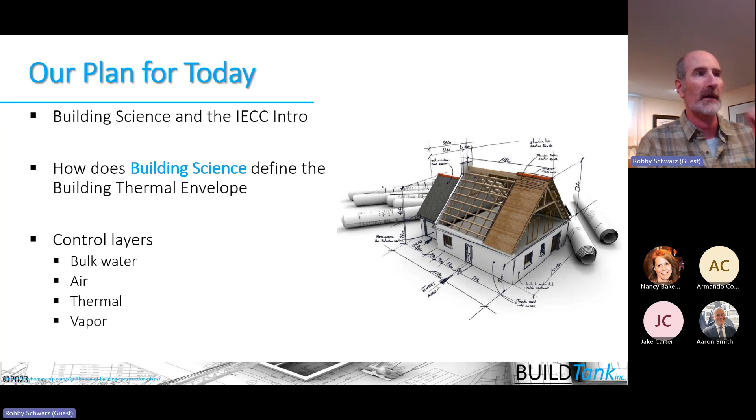So from this perspective of introduction, really our modern day times and the expectations that we have of our houses have changed the way that we build our houses, and hence the need to bring building science more into code. A simple example is that house on the left here that was built in 1910. And if we think about our notion of comfort in 1910, our grandparents might have been in that house. They were really willing to put on a sweater in the wintertime, maybe shovel some coal, put a log on the fire to maintain comfort in the wintertime.

In our modern day houses built in 2020 or 2023, we literally want to be able to walk around in our underwear from room to room and floor to floor and be comfortable. And in Northwest Denver where I live, we're scraping all these old houses, adding these new houses, and we have to figure out how we're going to build houses that are going to meet their expectations, but also be durable, be able to last that 100 years and whatnot.

So, the biggest thing we know is that these older houses are drafty and uncomfortable, yet they're very, very durable. And the primary reason they're very durable is that they have tremendous drying potential. And so as we insulate and we tighten up houses, we're building houses to meet that modern day expectation. We need to make sure that we have proper moisture flow through our building assemblies and proper drying potential. And that's kind of why we're going to be focusing on those control layers and the building science there.

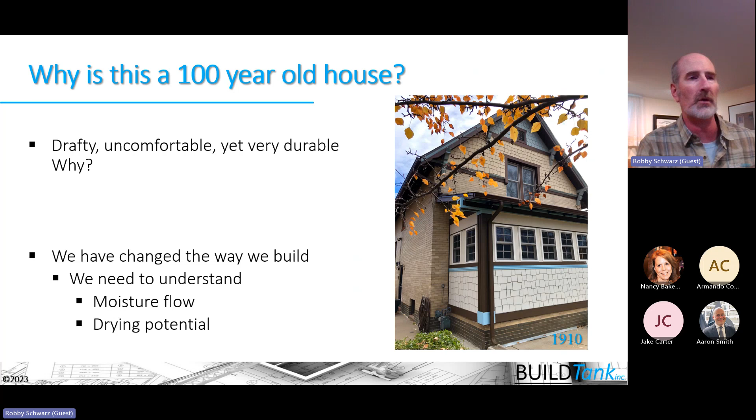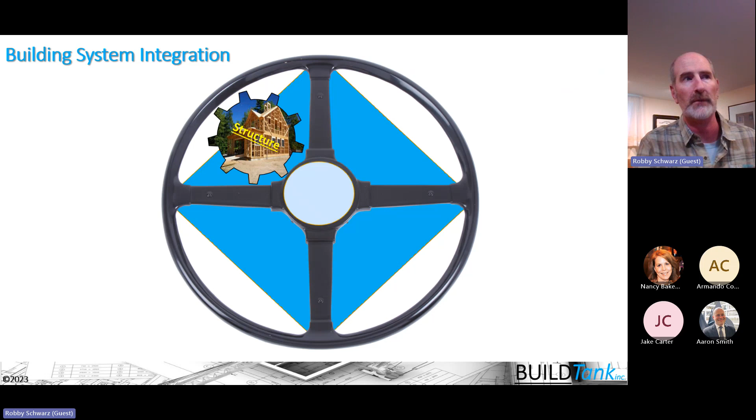From the basics of applied building science, we're really focusing on airflow, heat flow, and moisture flow, and ultimately getting control and predictability of those assemblies that govern moisture flow, heat flow, and airflow in our houses. We're talking about the structures, the systems, the enclosures, and the climate that house is built in.

But the big wild card that the science helps us govern, that the code itself might not look at, is that the code is looking at structure, systems, enclosure, and climate, but the code doesn't integrate people and the crazy things that people do to houses. So incorporating building science into the code gives us the ability to say that if I've built a house for a retired couple of two and the contract falls through and a family of six moves in, that house is still going to perform regardless of the crazy things that people do in it.

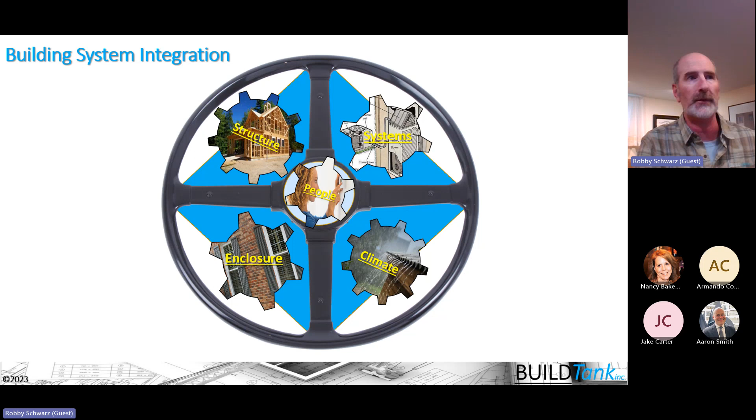When we talk about these control layers and the building science wrapped into the code, each of these control layers is usually listed in order of importance—from bulk water and rain control layers, to air, because of the amount of moisture that moves with air, to vapor control, to thermal control. I'm going to describe them from a code perspective, starting with the thermal envelope, then vapor, air, and bulk water, because you'll see the code—especially the energy code—has this myopic focus on the building envelope and protecting the integrity of the building thermal envelope, then it goes into vapor, air, and bulk water.

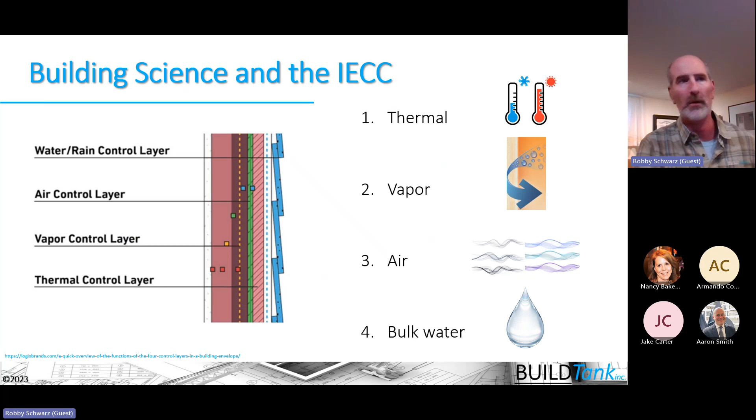The thing we should know about the code is that it's intended to provide flexibility, and that flexibility comes in through different compliance options the code allows. It turns out that builders, especially custom builders, tend to myopically focus on the R-value table, but the R-value table is basically a thou-shalt-do approach to code, and it doesn't give you the flexibility to do what we call trade-offs, which I'll explain a bit.

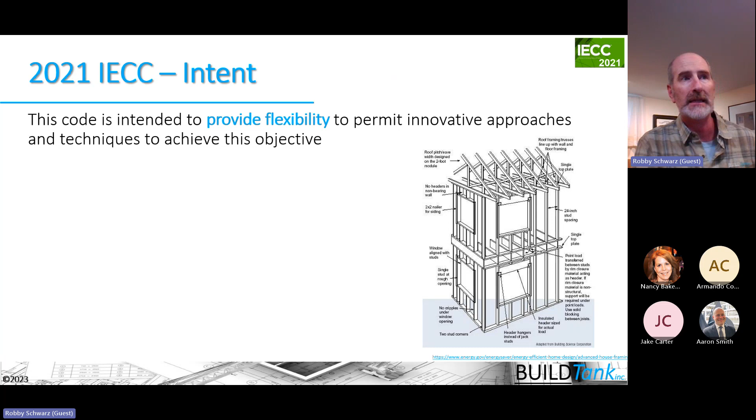When we begin to look at the code, we first have to choose that compliance pathway. That's really a paperwork exercise to tell the code official how we're proposing to build the house to meet the expectations or requirements of the code. That's twofold: one is the energy use that's happening, which is why we begin with maybe some type of energy modeling, and then the actual installation requirements laid out in sections R402 through R404.

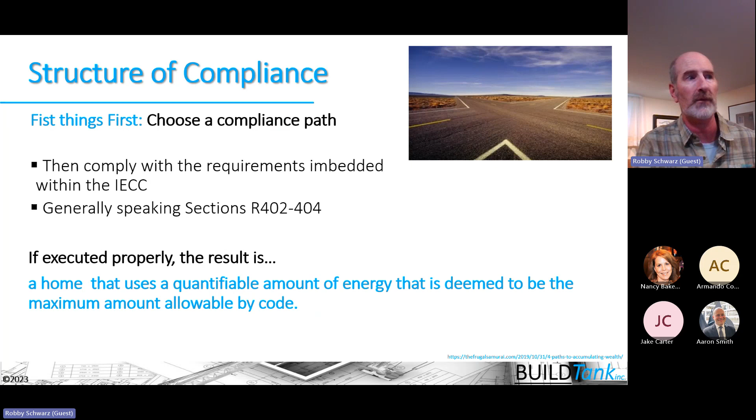These compliance pathways revolve around two compliance pathways that are in the prescriptive section of the code: the U value and R value table, and then the prescriptive UA compliance option. Then we get into performance compliance options, and in the 2021 code they added a tropical zone or tropical climate compliance option.

In addition, in the 2021 code you have these additional energy efficiency requirements that you have to choose. You have some choice in what you select, but you have to do some level of additional efficiency that revolves around building a tighter envelope, adding higher efficiency mechanicals, or bringing all your duct into conditioned space. You have some choices there.

But getting into the compliance here, the prescriptive U and R value table doesn't give you any options or flexibility in how you're going to build that house. These three pathways that utilize software do start giving you some flexibility and options to be able to do what we call trade-offs. These three options utilize the additional energy efficiency packages a little bit differently.

The prescriptive pathways have you choose from these specific options. The total building performance pathway says that you basically have to build about 15% better than you normally would have to build to, and the energy rating index kind of follows that same notion.

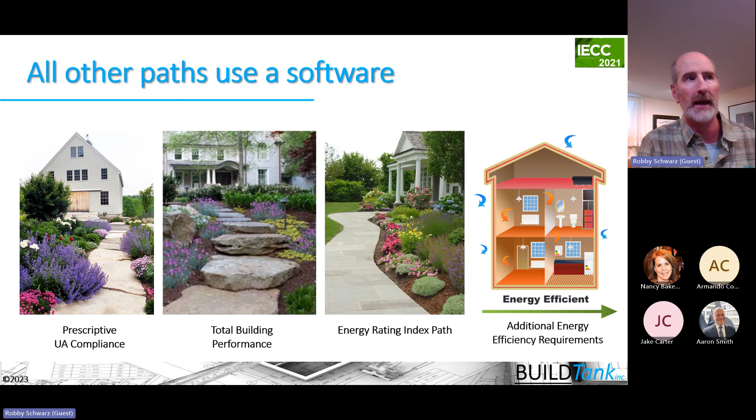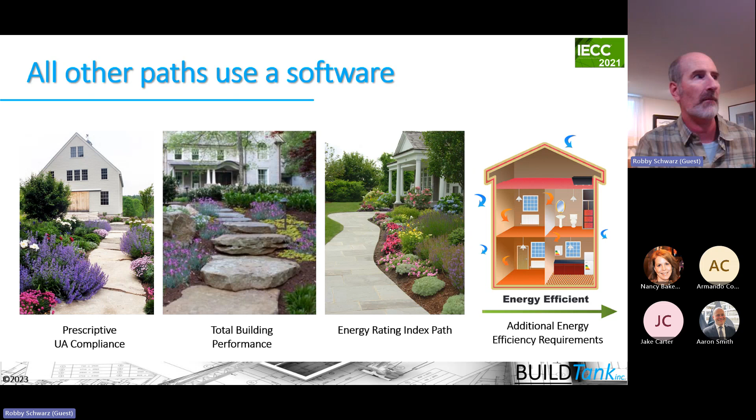So what we're getting at here is that the energy code is starting to adopt energy modeling as a means to demonstrate compliance. And the best thing from the perspective of energy modeling is that it allows you to fail fast and fail on paper so that you can succeed faster and meet the requirements of the code.

Basically what an energy model does is build the geometry into the house, into the energy model software. The energy model builds two houses that are geometric twins of each other. We have the reference home and we have the rated home, sometimes called the builder's house. And the builder's house is compared to that reference home in order to demonstrate compliance.

The specifications for the reference home are defined specifically as a standard set of house specifications that generate a consistent and quantifiable amount of energy use. So the code reference home is overlaid with the U value table when you're using the area weighted U value process, or a table that is built into the code in section R405 that defines the reference home.

But in essence, the reference home, if you built to the exact standards of the reference home, you would have a house that is a standard set of specifications that derives a consistent and specific amount of energy performance - that is deemed to be what the code is asking for, what the code is requiring us to do.

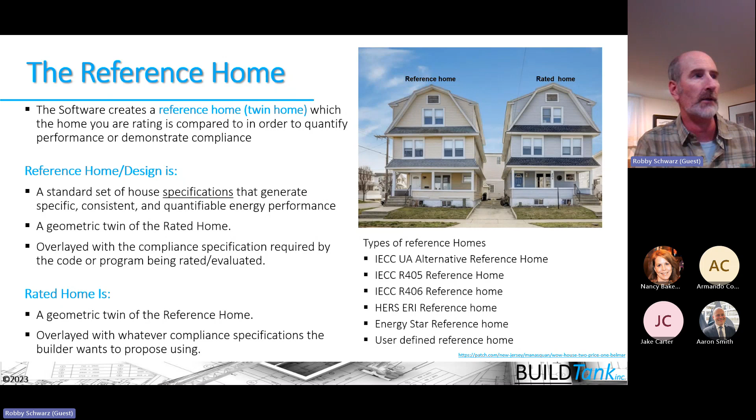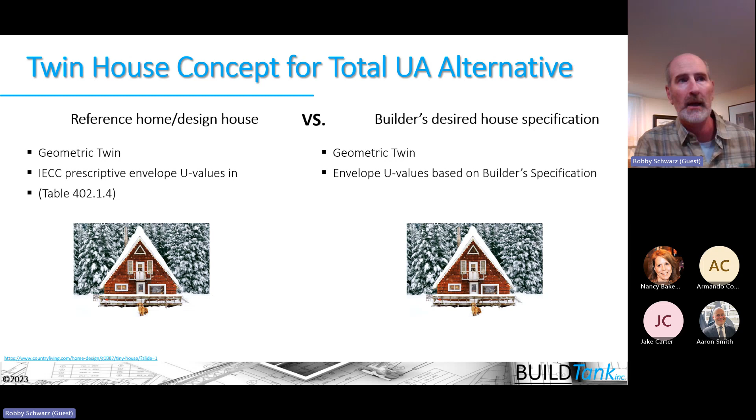In its basic way, we have that reference home. Again, they're geometric twins of each other. The reference home is overlaid with the prescriptive U values that are in the R402 table. The builder chooses whatever specifications they want to use. And in essence, the builder's house has to be better than or equal to the reference home in order to demonstrate compliance.

This gives us flexibility to do what we call trade-offs, which is basically putting something more in one location so I can put something less in another location and keep a balanced energy equation that is deemed to be compliant with the code.

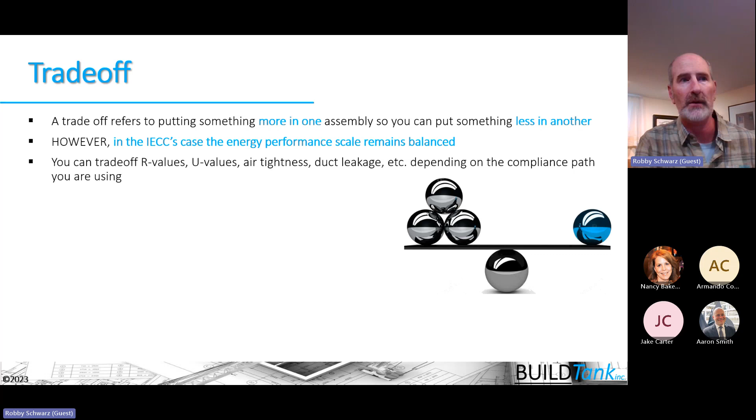So in this way, the energy modeling could say that in climate zone 5, the blue ball might represent attic insulation of R38, when the requirement by the R value table says I have to install R60 attic insulation. And I, as a builder, say no way, I've never put that much insulation in my attic. And we can say, well, that's perfectly fine - you just can't use the prescriptive R value table to comply with the code.

You have to move to an energy modeling approach and demonstrate that you put maybe 3 silver balls or 3 other things in your house that would represent maybe better windows that you might already be doing, maybe a more airtight house, a tighter duct system, or more insulation someplace else.

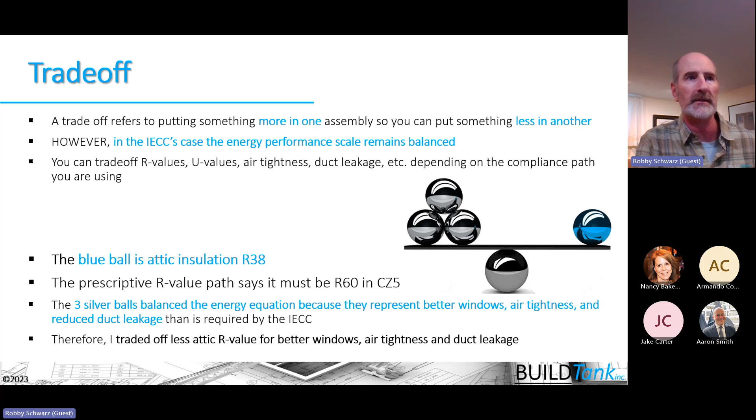To trade off the less R value in that attic. So that's how we get flexibility, how we get the ability to figure out what's really the most cost-effective way to build a house that meets the requirements of the code there.

So that energy modeling part is really all building science. Now we're going to move into the thermal control layer, because you'll notice that the code is again focused heavily on the building thermal envelope. It doesn't really address mechanical efficiency at all until the 2021 code, where in the additional efficiency options, one option is to put more efficient mechanical equipment in the house.

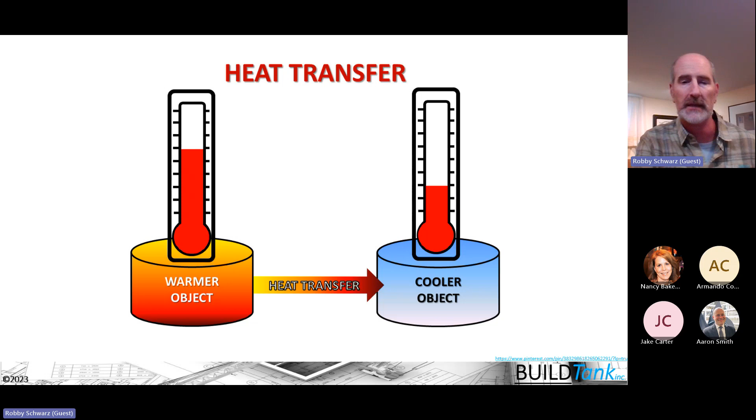But in the past, and even now, you could still put in an 80% furnace, and that's fine, but they want to ensure the thermal envelope is sound, because ultimately it's based on how energy moves in our house. It always moves from higher concentrations to lower concentrations—from inside to outside in winter, from outside to inside in summer. The energy code gives us an idea of what the inside design temperature is, because it's defining the delta T.

So again, this is building science—the movement of energy and how it conducts through our building thermal envelope. What we know, and the rationale here, is that our HVAC systems will not work unless our building thermal envelope works. That's one of the biggest reasons we have so many HVAC complaints in our homes. It's not necessarily that the HVAC system wasn't designed or working properly, but often it's because there are defects in the building envelope that we designed in.

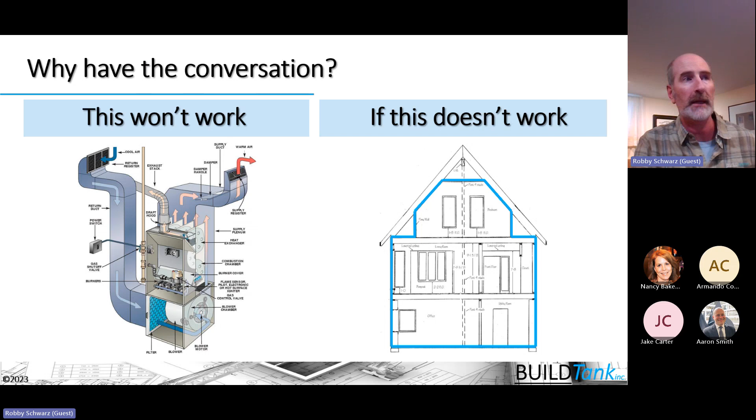So let's say I designed an R20 batt wall, but those batts were installed so poorly that they're actually performing like an R10 instead of an R20. That's going to cause a big problem for our HVAC system's ability to work.

So the building thermal envelope is defined in a specific way in the energy code. You can see it's an assembly of things—basement walls, exterior walls, ceilings, roofs—all these assemblies coming together to give us a clear boundary condition between conditioned space and exempt unconditioned space.

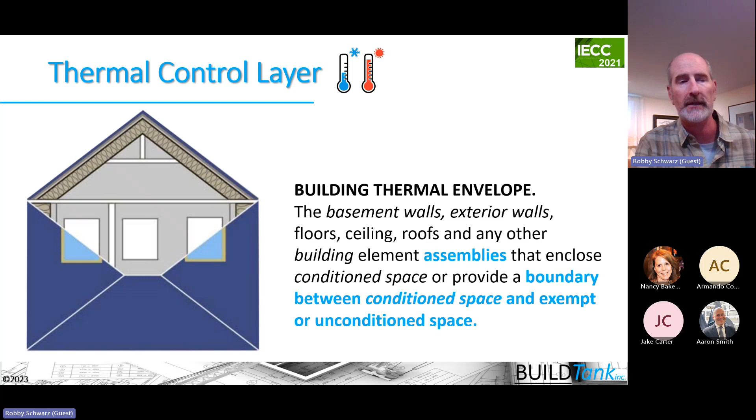So when we look at that, we can say the energy code is really looking at a belts and suspenders approach, where we have a primary interior air barrier, which would be the continuity of our drywall system, and a primary exterior air barrier, which would be the continuity of our sheathing material around the house. If we have continuity of both, we have this belts and suspenders approach.

That's really kind of different, I think, than the way a lot of builders talk about it—saying, 'I've got a clean exterior air barrier with my zip sheathing that's taped,' or 'I have a clean interior air barrier with my AeroBarrier system using the drywall as my air barrier.' That's fine, but we can't forget you're getting supplemental benefit from continuity on the exterior. You might get even more supplemental benefit by installing your exterior weather-resistant barrier, especially if it's a fabric type like Tyvek. There, you're going to get a continued belts and suspenders over belts and suspenders approach.

This is important to realize because when we get to the air side of things, the air sealing table is really pointing out where we don't have continuity and where we need to add supplemental air barriers to maintain continuity, either on the inside or outside of our systems. From a thermal perspective, when using air-permeable insulation, our ability to enclose cavity insulation traps air pockets and makes that thermal insulation work well in those assemblies.

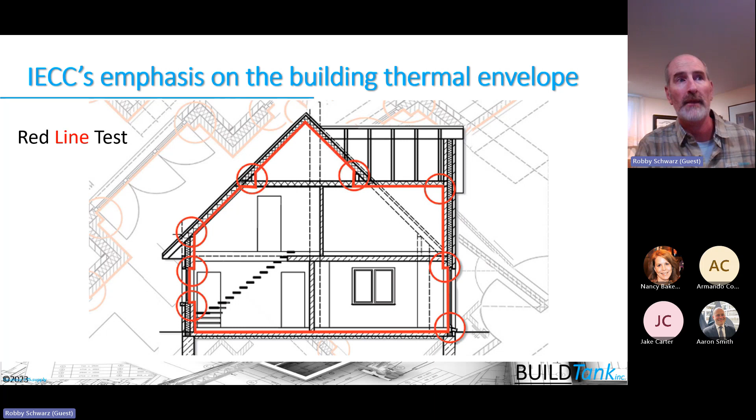Now, the next thing the code does is it's basically adopted this red line test that Dr. Joe Lstiburek kind of created, pointing out the continuity of our air barrier and thermal envelope assemblies, but also where things connect to each other. Those connection points are where the greatest leakage is going to happen in our home. So the code says that the building thermal envelope shall be represented on the construction documents.

If you were doing it with the belts and suspenders approach, you would depict the building thermal envelope with two lines, but the code doesn't really say anything about that. It says basically just depict it so the information can be sent into the field and hopefully help people understand the constructability of the assemblies that have been designed and made.

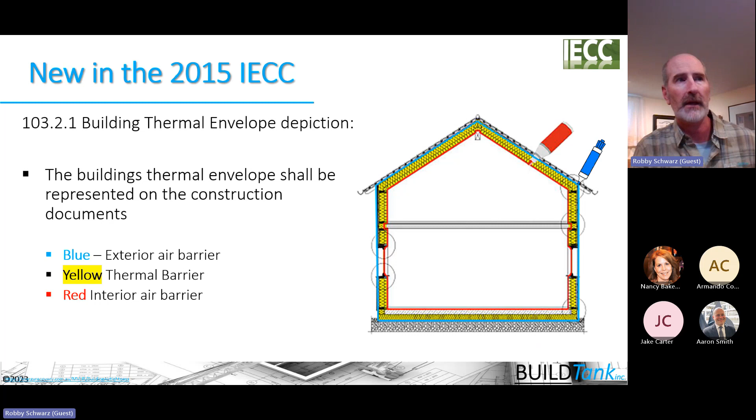Then the code goes on to describe the base R values that have to be put in each of the component assemblies that have been built here. And you'll see in the 2021 IECC that some of those R values have changed pretty drastically. But remember, you don't have to necessarily put R60 attic insulation in that assembly.

You have to have the same level of performance as if you did, but you could trade that off for lower insulation. Builders are quite concerned right now about R5 continuous insulation. So in Climate Zone 5, you have all these choices for how you can build and insulate your wall assembly. R5 continuous insulation is a detail that's hard for a lot of builders. You might be able to trade it off, but you'd have to move away from the R value table.

But you can see that they're setting a core expectation that we have a well-insulated building thermal envelope. And although you can trade off some of the R values in different components, you're still going to have a strong, well-performing building thermal envelope using any of the compliance options in the code.

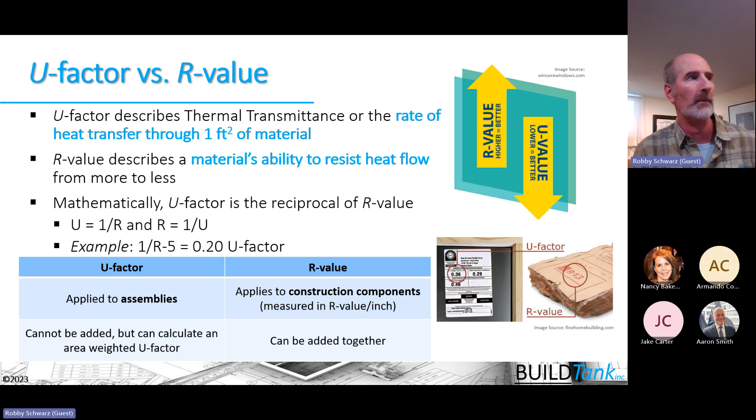Now, in order to protect that building thermal envelope, in the 2021 IECC, some sections have been added in Chapter 3 to talk about this whole new crop of insulation that's out there that doesn't have an R value mark on it. And if it doesn't have an R value mark on it, it's really difficult to understand what the R value of that insulation actually is.

So what the code is asking for now is that the installer actually certify the installation and leave that certification at the time of install for the code official or a third party to come in and verify.

So in essence, what they should be doing is some R value testing of their walls and whatnot to ensure they're getting at least the R value, that the density of the blow is actually achieving the R value they proposed to put into that house, instead of just estimating or assuming. Whether that happens or not is up in the air, but at least we should be getting this certificate so you can hold somebody accountable for the R value actually installed in that building.

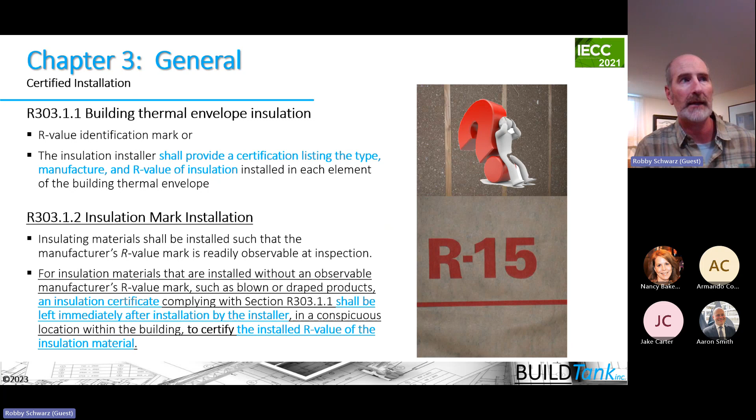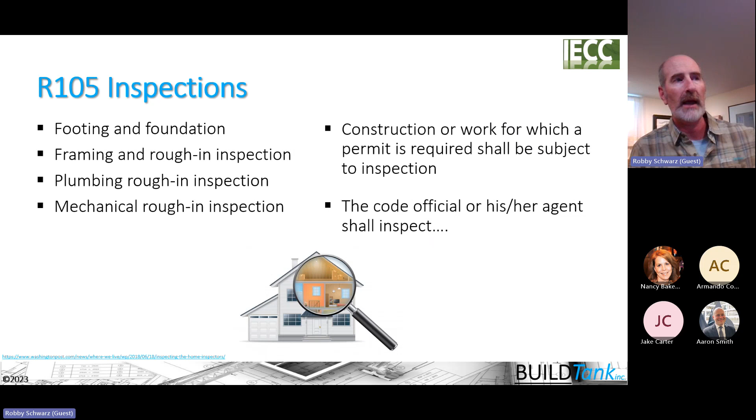So again, in an effort to protect the building thermal envelope, this is what the code is doing. The other thing we see from the code is that inspections for energy require all these different types of inspections. When you look at the code, you see the inspections start to be narrowed into what is actually an energy performance issue, to help guide the construction or the code official field staff to inspect properly.

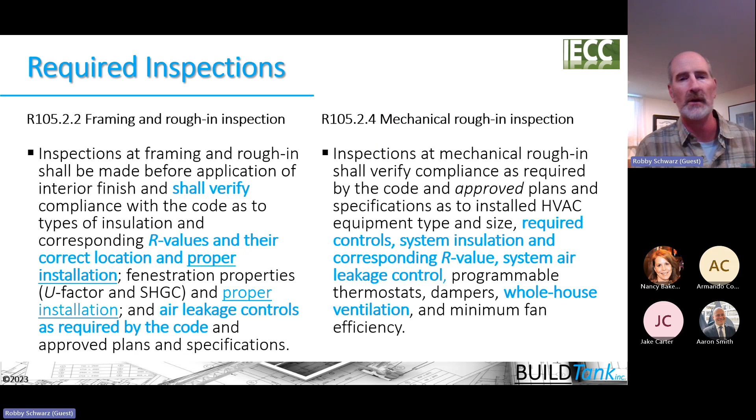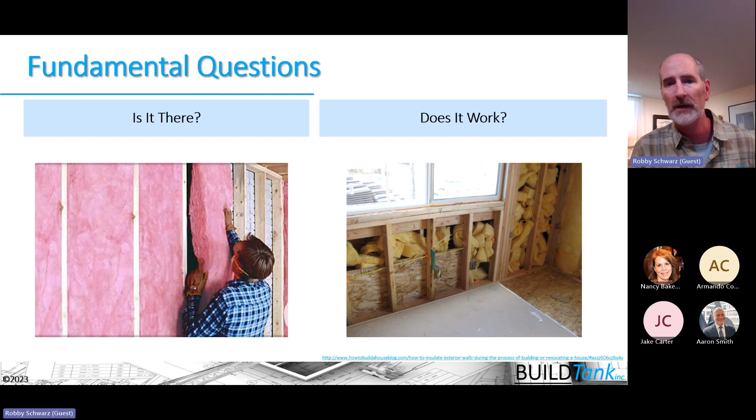So we're looking at the R values, and not only the R value, but has it been installed so it actually works in the assemblies? We need to look at those air barrier details, air leakage controls as required by the code. Similarly on the mechanical sections, we're looking at required controls, system insulation and corresponding R values, system air leakage controls - that's the duct leakage part. Also whole house mechanical ventilation control and minimum fan efficiencies. So performance is becoming a big part of the inspection process. We can't go into a house and just say yep, I see pink in the walls, and walk on to the next inspection. We need to ask the next question: yes, the product's there, but has it been installed so it's actually going to work in our assemblies?

So the insulation's here, but you can see in the upper right-hand corner, for example, the insulation isn't actually touching the surface that it's intended to insulate. At rim joists, that becomes even more important because we're not requiring that interior air barrier at the rim joist - that's one of the exceptions in the code. You have to have that belt and suspenders approach in the above grade walls, but at the rim joist it says specifically you have to rely solely on the exterior rimboard air barrier material. So we need to make sure the insulation is installed properly to make that work, and that we're getting the code required air sealing done. Just one last example - asking that simple question, is it there and does it work, will help our inspection process.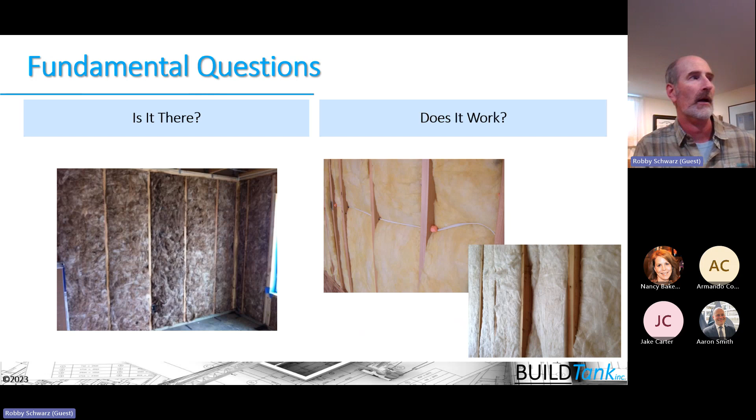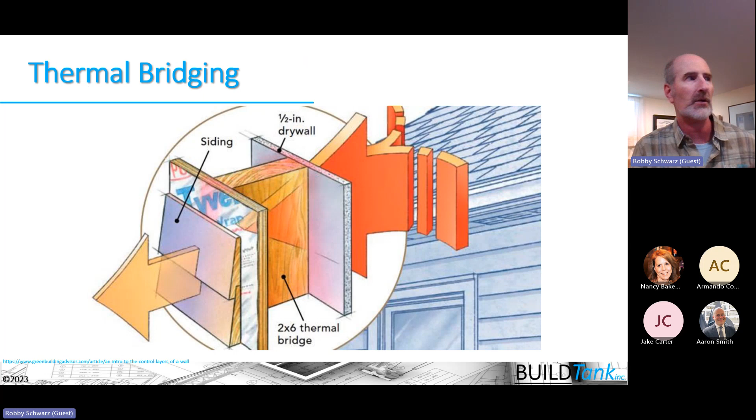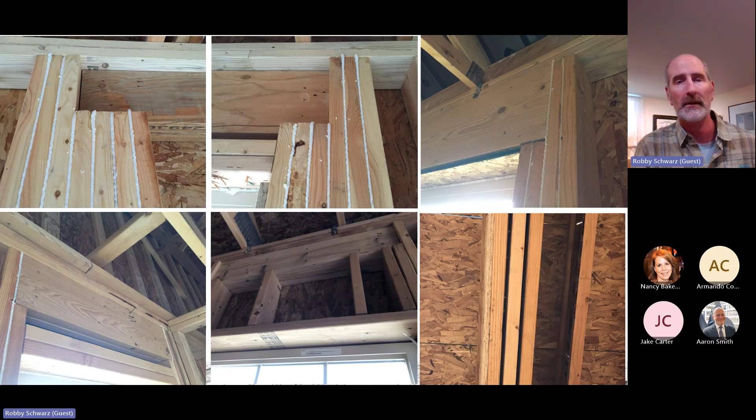Now the code also addresses some aspects of thermal bridging and the condensation created from thermal bridging. We know that if one king stud is good, two is even better, maybe six is better, and fifteen makes it even better from a framing or engineering perspective. But the reality is we're over-engineering our houses, and often the framer is acting like an engineer, just adding a bunch of wood to the assemblies and creating cold spots in our houses that cause repeated wetting and condensation issues.

So the code actually says we should be reducing framing in two particular areas of the building thermal envelope. One is at corners - we're supposed to have insulated corners, not only in the true exterior walls, but where interior walls meet exterior walls, some type of three stud corner or ladder blocking to get our full insulation depth. We should also have insulated headers. So we need to work with our framers, but also with our engineers, to understand this is a requirement of the code.

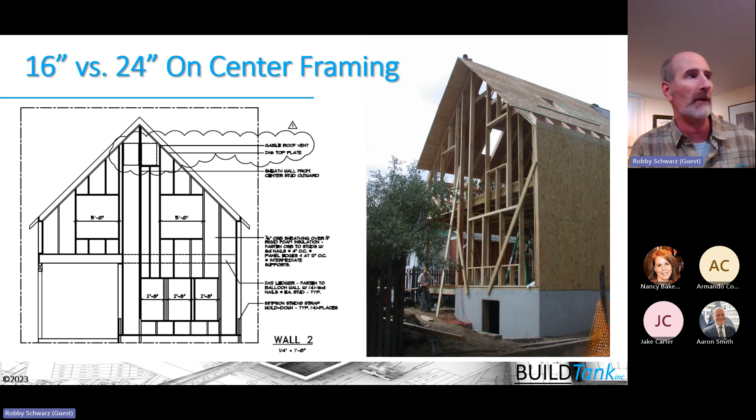Yes, there'll be an exception here and there where I've got to have a true 3-ply header to carry the load, but in most cases you can either go to a 2-ply header and push it to the exterior, or replace spacing material with foam board and get a system that works well and reduces that thermal bridging, reduces that cold spot that's creating condensation. Yes, and we could even go to 24-inch on-center framing. We can go back to balloon framing, exemplified here, and get these systems. The code isn't telling us we can't do these things - it's actually wanting us to do what we can to make a sound building thermal envelope, to reduce mean radiant temperature and ensure comfort inside our houses.

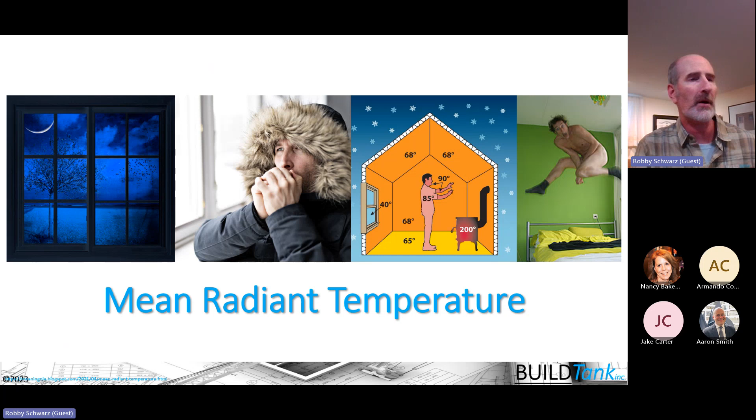The last part with regards to the building thermal envelope is window to wall ratio - that's the fraction of the above and below grade wall area covered by fenestration, and there's a formula for calculating that. In the energy code, if your window to wall, window to floor ratios are above 15%, you start getting dinged, which means it's harder and harder to trade off if your window to wall ratio is high. The rationale is that windows are simply the weakest link in our assemblies. If you did the area weighted R value calculation, and I assume I'm building a great wall because I'm insulating the cavity with R23 blown fiberglass, when I take into account the wood in that assembly, I drop that R value about in half. Then when I install a window with an R value anywhere from 2 to 6, I'm going to drop the R value even more.

And the higher the window to wall ratio, the more the impact to the overall wall R value of that assembly. So it's something to keep in the back of your mind. It's not something that's easy to get at.

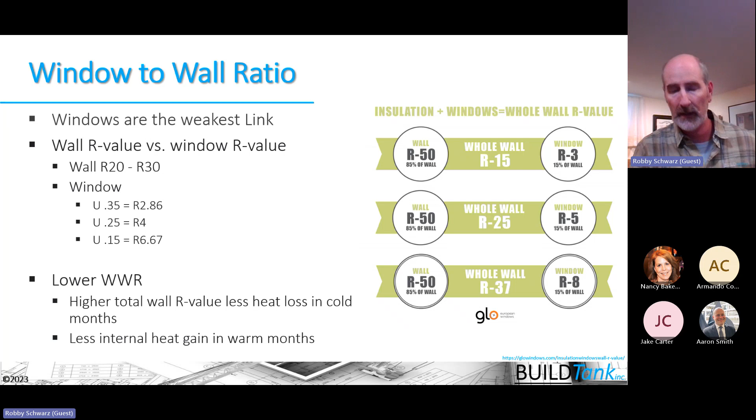But one of the things that I think is important is to begin to talk to architects about proper design parameters around the placement of windows, and not just putting windows in to put windows in, but thinking clearly about how I'm bringing light in, how I'm maximizing views, but how I'm also protecting the integrity of the building envelope.

One of the things that we can do is go to triple pane and quad pane windows and get lower and lower U values in those window assemblies. You can see that there's some great performance benefits to do that, but you also have some lower visible light transmittance, higher price, obviously heavier units. But again, I think the performance characteristics really outweigh the downsides of going to those windows.

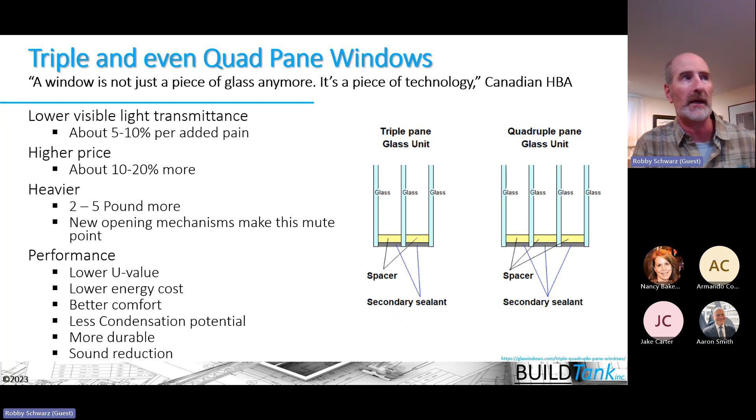So from an energy perspective, kind of building science perspective, our biggest bang for the buck is glazing, not going over that 15 to 20% window to wall, window to floor ratio, potentially putting less wall, less wood in the assembly, and then thinking about air tightness and insulation of those assemblies to make it work.

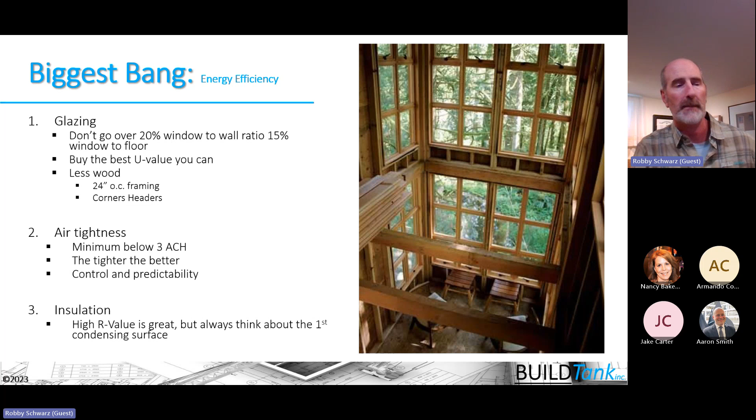Okay, so we're going to move on to the next assembly, which is our vapor control layer. Now, the vapor control is designed to reduce the amount of moisture that is able to get into our assembly, but it's only really addressing one process of vapor transport, which is vapor moving into the wall by the process of vapor diffusion.

What we know is that diffusion is a really small process of how water migrates from higher concentrations to lower concentrations to create equilibrium. This study was first done by Building Science Corporation, demonstrating that over the course of a heating season, a third of a quart of water moves through that assembly - a really small amount.

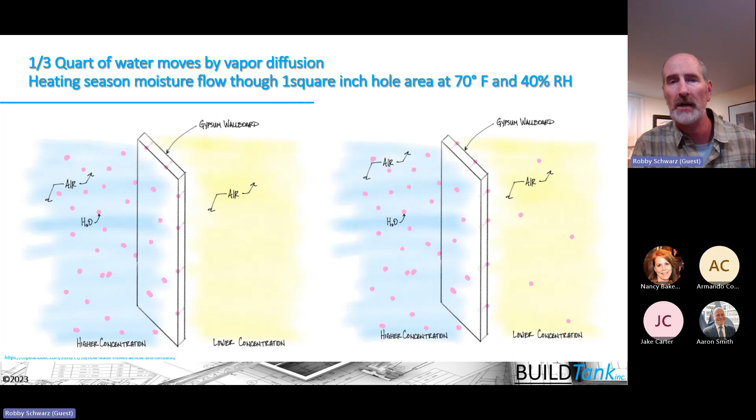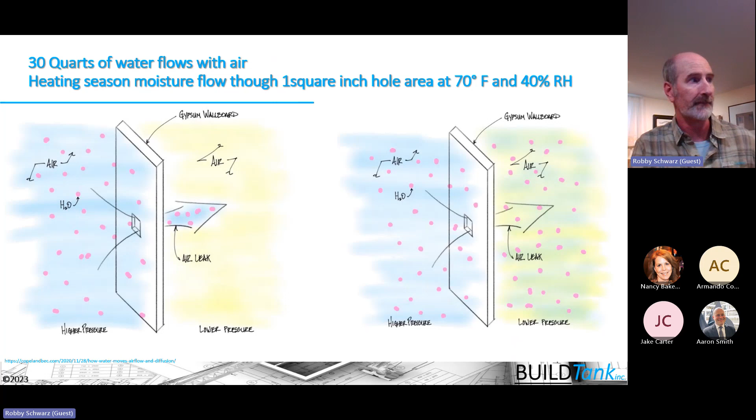Yet, from a code perspective, we concentrate on the vapor retarder traditionally much more than house tightness, and air leakage is that biggest, strongest mechanism that can carry water into our assembly. So we really need to concentrate on leakage in those assemblies rather than the vapor retarder, and promote drying over wetting of these assemblies. So you'll see in the code when we get to the air leakage section that the code is asking us to seal these...

...electrical boxes to the drywall to stop leakage, to use airtight boxes. And it's giving us mechanisms to stop that moisture from getting into the assembly in the first place. Again, the majority of the moisture is getting into the assembly by air leakage versus vapor diffusion. And the consequence of that is potentially repeated condensation or wetting of the assembly once that moisture hits the cold exterior sheathing, or that first condensing surface.

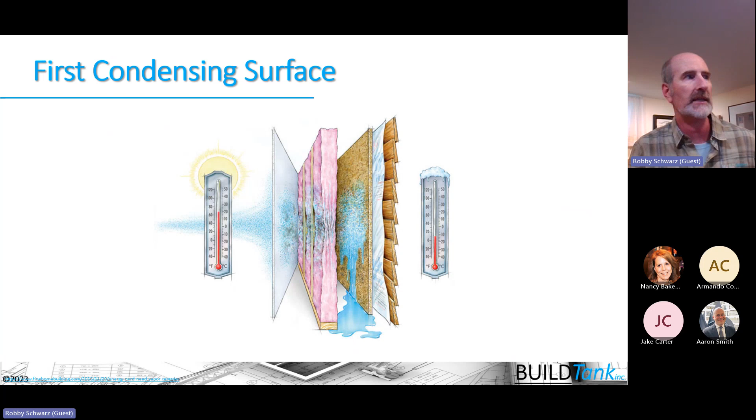So we can use the psychrometric chart, or these other kind of knockoffs of the psychrometric chart, to give us an idea - if we have air, typical temperatures in Denver, 70-degree air, that's 35% relative humidity.

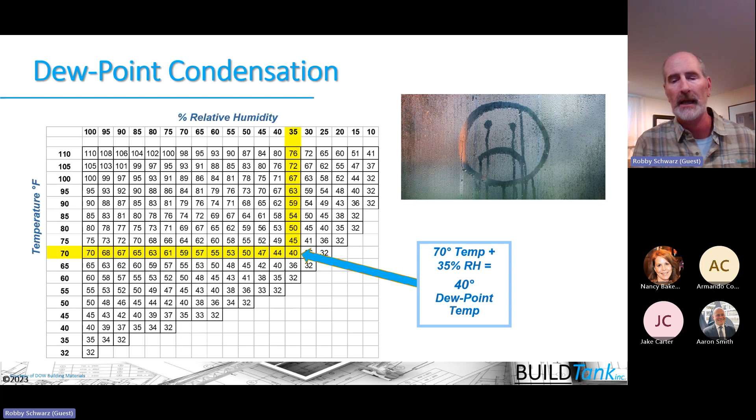If it hits a surface temperature, whether that's a window or exterior sheathing, that's at 40 degrees, that moisture in that air is going to create a dew drop, it's going to create that condensation.

And that repeated wetting is what destroys houses over time. So the code says that we have to install a vapor retarder in our assemblies, but the problem is it doesn't give us any guidance. There are no manufacturer instructions for how to install vapor retarders.

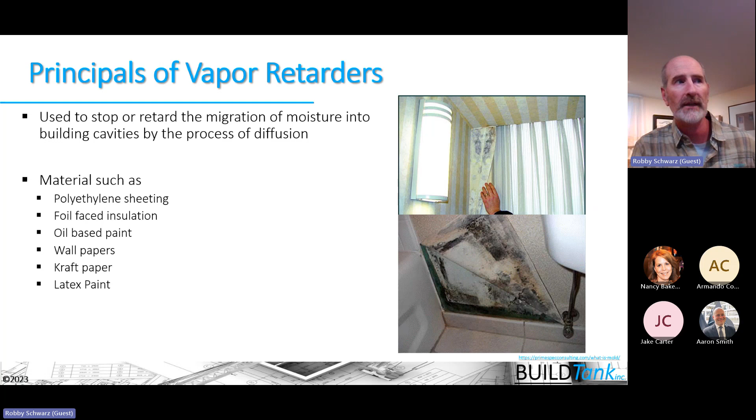And it doesn't then have the ability to dry back out. So what is the code saying about water management here? We're using the vapor retarder to stop or retard the migration of moisture into the assemblies. We have all these materials that can be vapor retarders or some level of a vapor retarder. So we need to understand the materials, and we need to ensure we understand them so that we're not putting a vapor retarder on both sides of the assembly.

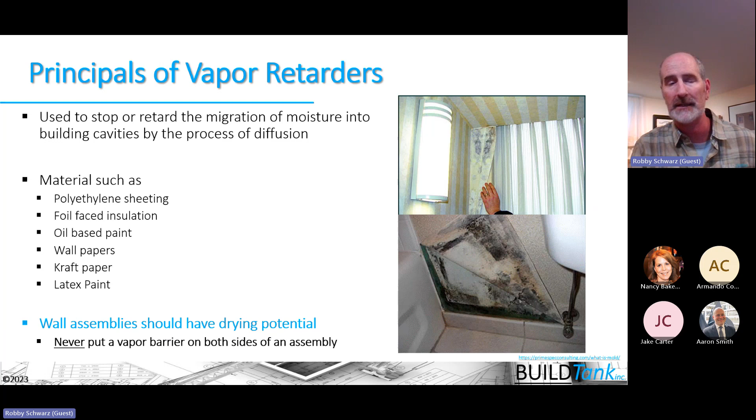So that leads us to this building science principle of doing what we call vapor profiling, where we're looking at the assembly and we're trying to determine what is the most restrictive component in that assembly that has the least drying potential, so that we can promote drying in at least one direction, if not both directions, ideally.

But now that I know that, I want to make sure that I don't put an interior vapor retarder on this assembly if I'm building in climate zone 5, for example. So that's the value of the vapor mapping here.

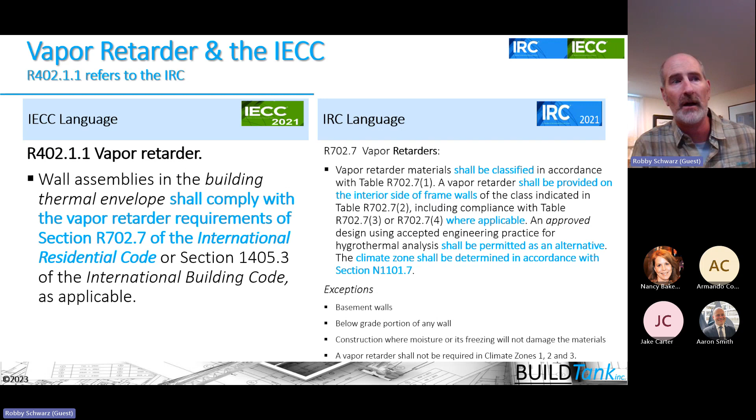And one of the places that we shouldn't install it is on foundation basement walls. In Colorado, we often insulate our unfinished basement foundation walls, so they're conditioned space but unfinished, with a vinyl faced fiberglass blanket, which is a vapor retarder. So unbeknownst to a lot of builders, they're putting a vapor retarder in some place where they shouldn't, because they're trying to get separation of the insulation from the occupants, which is also required by the code.

So we want to make sure that those materials have perforation in them that allows some permeability and drying to the inside of those assemblies. Next, we get to

this section of the vapor retarder that talks about the different classes of vapor retarders that can be installed. A class 1 vapor retarder has a perm rating of less than or equal to 0.1. A class 2 has a perm rating of greater than 0.1 and less than or equal to 1. And a class 3 vapor retarder has a perm rating of 1 to 10, so it has the greatest drying potential.

And in Colorado, we're trying to promote always using a class 3 vapor retarder, and it's turning out that in most climate zones we're really trying to get to that class 3 vapor retarder to promote drying as much as we possibly can. And when we talk about drying, it's basically drying by the process of diffusion, that vapor being able to migrate out of the assembly by the process of diffusion.

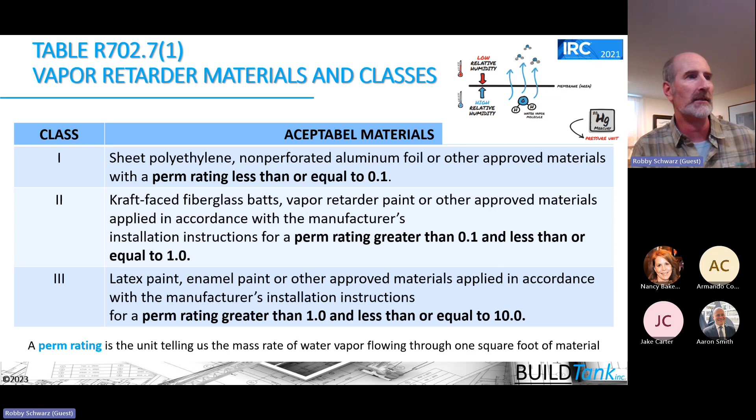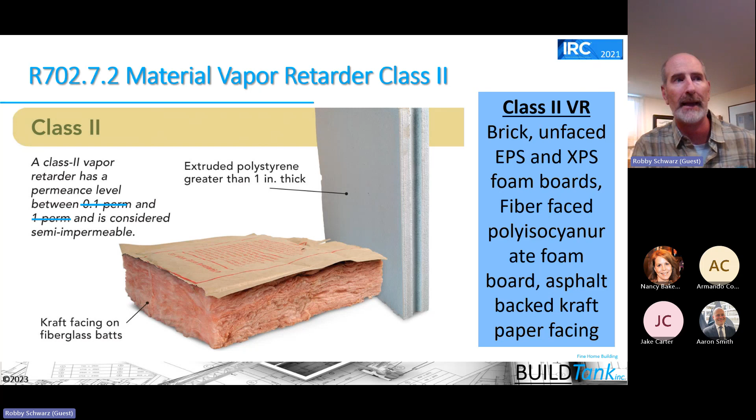So a class 1 vapor retarder includes things like polyethylene, aluminum foil, sheet metal, those types of things. A class 2 vapor retarder, some of the rigid foam materials, but kraft-faced batt is kind of the original Gore-Tex material, it stops moisture in one direction, kind of a smart barrier, but allows moisture to dry back out of that assembly. And then a class 3 vapor retarder, the biggest one used most often is latex paint, but you see a lot of the insulation materials are also some level of vapor retarder as well, in terms of their permeability.

That's why we want to look at the vapor mapping of the assembly, because as you start layering in all these things, you could be creating a whole assembly that's a vapor retarder, or one that's more predominant or not. Now, this is new to the 2021.

This chart tells you where you can use which class of vapor retarder. You can see class 3 can be used in all climate zones until you get into climate zone 4 through 8.

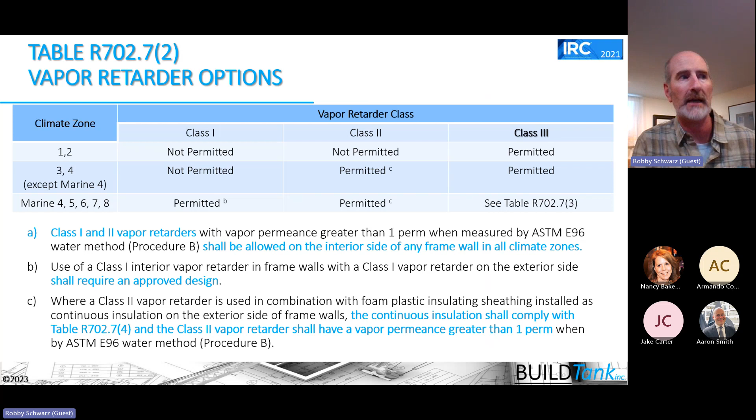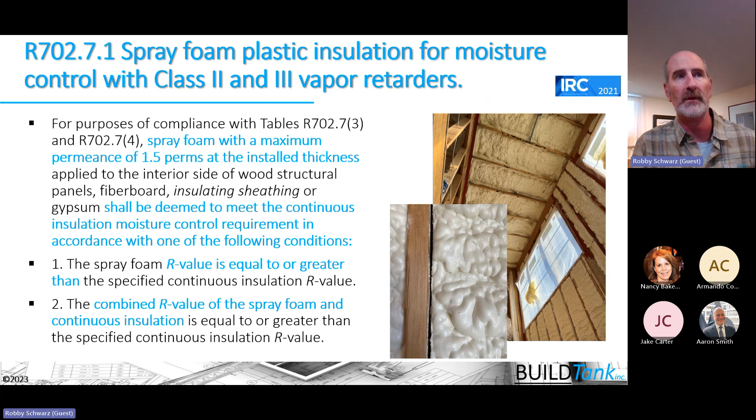The code also talks about spray foam thickness in order to create a vapor retarder. Not only do we need the right thickness of material, we need to ensure it's installed properly. You see the picture on the lower left, that spray foam has not adhered to the studs or to the exterior sheathing, so it's not going to work as an insulating material, and it's not going to work as a vapor retarder. We need to make sure it's installed properly, again that question of, is it there and does it work?

This is the table that tells us how we can get to a class 3 vapor retarder. In climate zone 5, you can have vented cladding over wood structure, other types of vented cladding, or some level of continuous insulation. What that continuous insulation on the exterior does is warm up that first condensing surface.

It's nice because at a level of 3 air changes, which is the code requirement in climate zone 5, you're going to have some level of air leakage into those assemblies. So in order to ensure that vapor stays in its vapor state and has the ability to dry out over time and not condense, we need that exterior continuous insulation or some type of vented cladding to promote continued drying to the outside.

The problem with the idea of vented cladding is that the code doesn't quantify the minimum airspace needed. So groups like Building Science Corporation and other building scientists have demonstrated that 3/16 of an inch is all we need for that ventilated cladding.

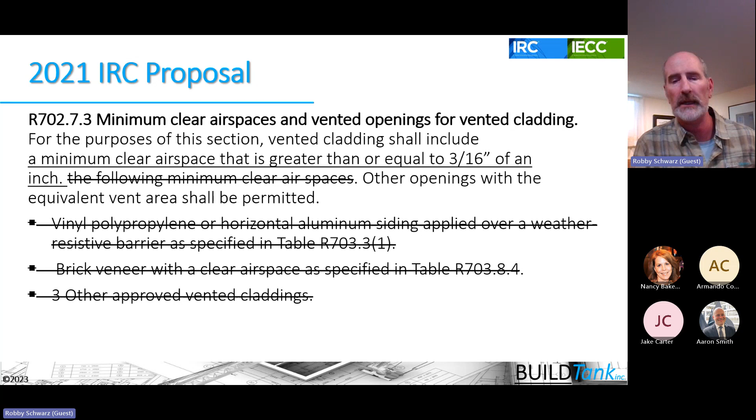We tried to put a proposal into the 2021 IRC. It didn't pass, so we'll continue to do that. Right now, this crossed-out language is how they're defining the vented space. Different jurisdictions are going to interpret that differently, but just know that all you really need is at least 3/16 of an air gap to the outside.

Then class 2 vapor retarders also have requirements in terms of adding continuous insulation in certain climate zones in order to use a class 2 vapor retarder there, so they have a whole table associated with that. You'll see some jurisdictions in dry climates have basically gotten rid of the class 1 vapor retarder requirement, or have modified these tables to make it easier to build more forgiving assemblies. So if you're involved in code compliance or code adoption in your jurisdiction, this might be something you're looking at.

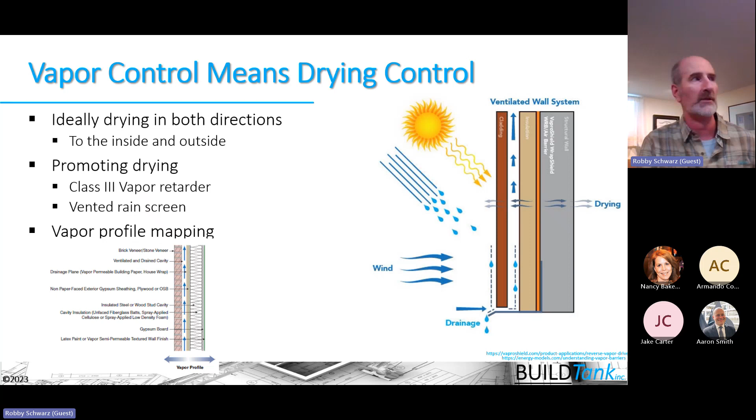Ultimately, vapor control also means drying control. How are we going to prevent our systems from getting wet, and how are we going to let them dry, ideally in both directions, but at least in one direction? In climates like climate zone 5, we always want to have drying potential to the inside of our assemblies. The code is really helping us understand that, but we have to build our assemblies to allow that drying potential, and the code is guiding us.

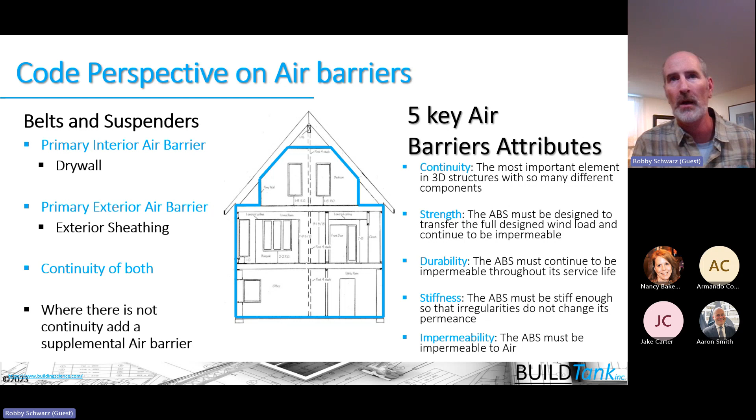Let's look at the air control layer. Again, that belt and suspenders approach, but the code doesn't describe anything more than continuity as a principle of air barriers. We also need to think about the strength, durability, and stiffness of the air barrier. So we're leaning towards adding rigid air barrier materials when adding supplemental air barriers. In Colorado, we often see Thermo-ply added to get continuity of the air barrier system, maybe behind a tub on an exterior wall, on the attic side of a knee wall, or behind a fireplace.

Continuity is a huge aspect of that air barrier system. Again, it's defined basically as a combination of materials, an assembly of things. That belts and suspenders approach is what the air barrier is looking at here.

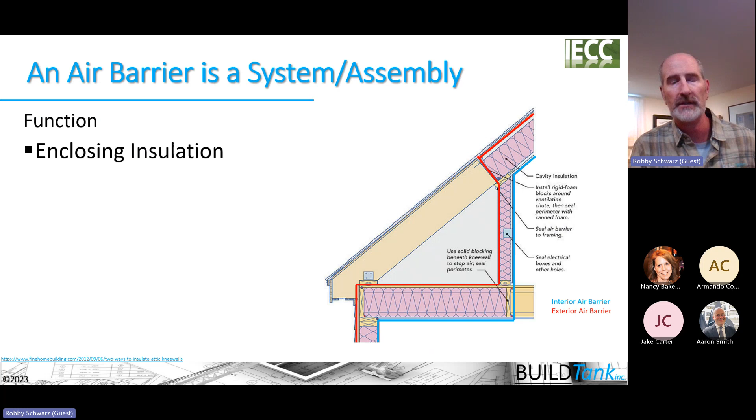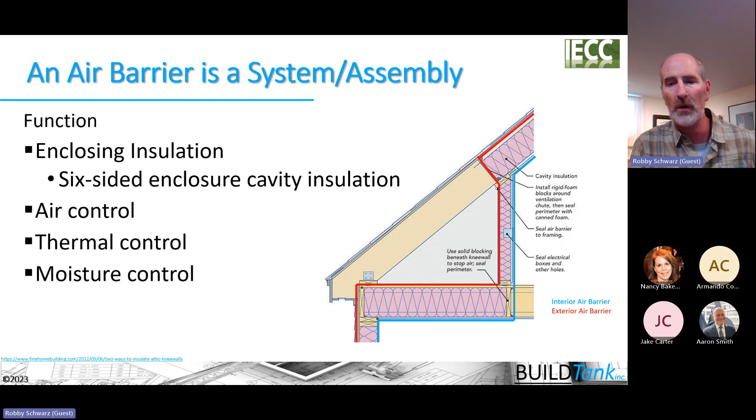So the primary function is to enclose fibrous insulation. We're trapping that air pocket, getting that true R value of the material. So you'll hear about that idea of 6-sided enclosed cavity insulation, especially when it's air permeable insulation. We're getting better air control, better thermal control, and moisture control here. That's the building science principle: control and predictability of airflow, thermal flow, and moisture flow in our houses.

The energy code tells us we have to have all these things on our construction documents. What's been added in the last few code cycles are these air barrier details. Details like installing that air barrier behind the tub, or getting the air barrier up to the bottom chord of the truss and the exterior wall so that this whole drop ceiling is brought into the conditioned space of the house, which means we have to have proper sequencing. We have to have the framer on board to know that they are responsible for installing that air barrier.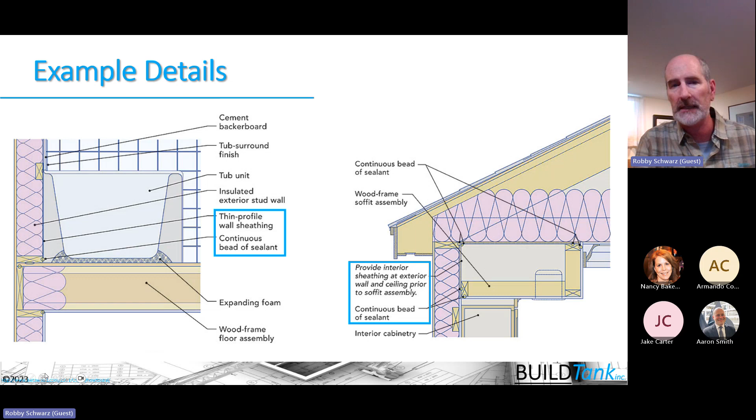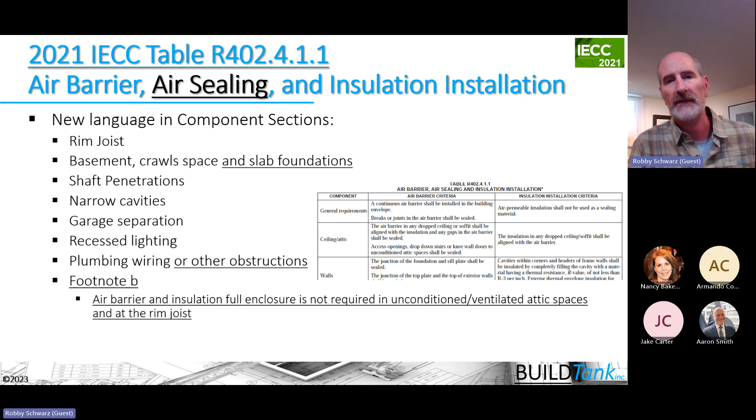And then doing the overframing and sequencing it properly. What you'll see is that about 90% of the air barrier details defined in the air barrier and air sealing table are really the responsibility of the framer. This table is just like the Energy Star thermal enclosure checklist. The components are listed on the left-hand side, the requirements for air barriers in the middle and air sealing, and then the installation requirements on the right-hand side. If we understand this table, you should have absolutely no problem achieving 3 air changes per hour.

So the code is all about building air tightness. They created this—I wouldn't say it's an exception, but you see that the maximum air leakage rate shall not exceed 5 air changes per hour. A lot of people think when they read that, that's an allowance to build a leakier house. The reality is that this is only an allowance in sections R405 and R406 for potentially trading off a leakier house for more insulation somewhere else in the envelope. Generally, I've never seen a trade-off go that way, so I'm not that concerned about it.

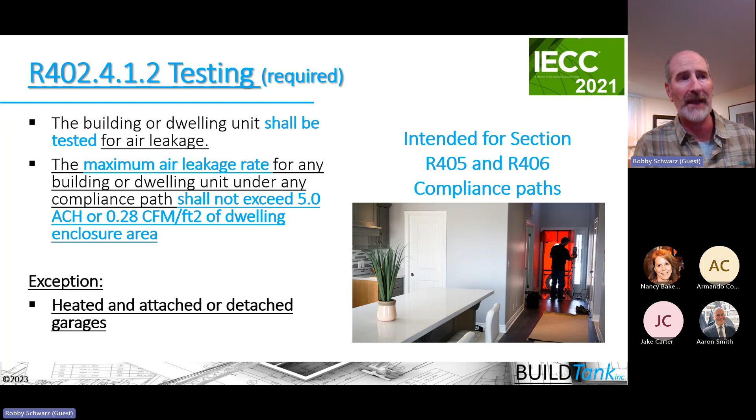But you'll get to this section that is allowing some leakier buildings for attached housing and smaller dwelling units. You'll also see that the air leakage metric has moved from an air change per hour metric, a volumetric measurement, to a CFM per square foot of enclosure area. So you add up the square footage of the 6 sides of the box, you get your total enclosure area, and you can't leak more than 0.3 CFM per square foot of that enclosure area.

The reality is I'm not sure we're going to need this metric much anymore for attached housing, because if you look at what's called the BXUV guide for building the shaft liner area separation wall that's used in townhouses and duplexes, you're now allowed to air seal that 3/4 inch gap between the gypsum firewall and the supporting framing there. So make sure you look at that if you're building townhouses or duplexes.

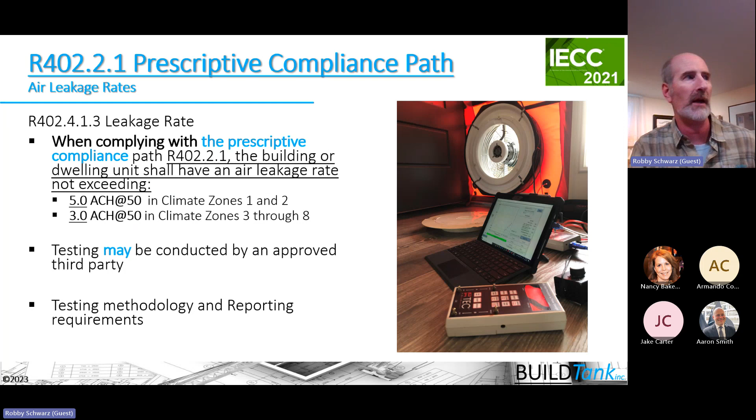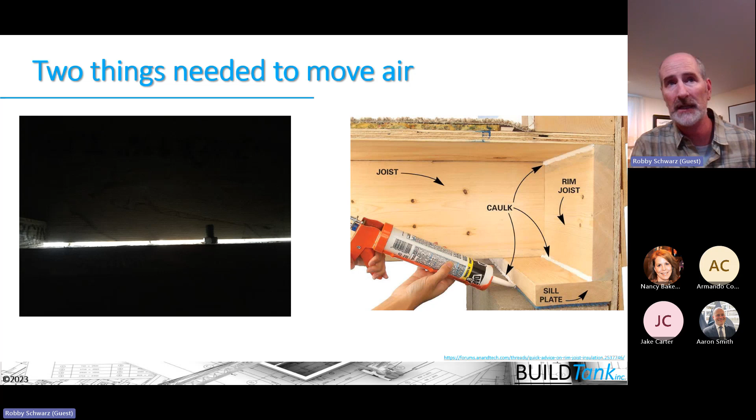And then we get to the prescriptive requirement, which is still at 3 or 5 air changes, depending on your climate zone. So again, there is that kind of relaxation if you're using the performance approaches—the true performance approaches, energy modeling for the simulated building performance or energy rating index approach. But the code is really focused on that sound building science principle and mantra: build tight and ventilate right. It's saying yes, we can control the holes, and that air barrier, air sealing table is telling us where we need to air seal, basically that we have to air seal everything around the building envelope.

But we can really control these driving forces or these pressures that happen in our houses. So if we're going to control the airflow in our houses, we need to control the holes. We need to tighten up the building envelope—build as tight as we can and then ventilate the house.

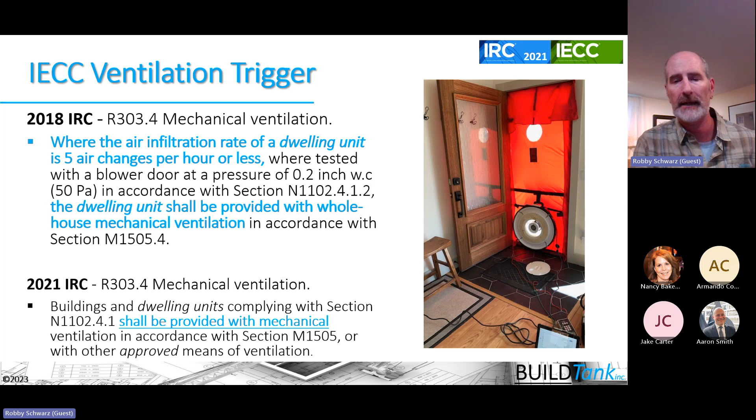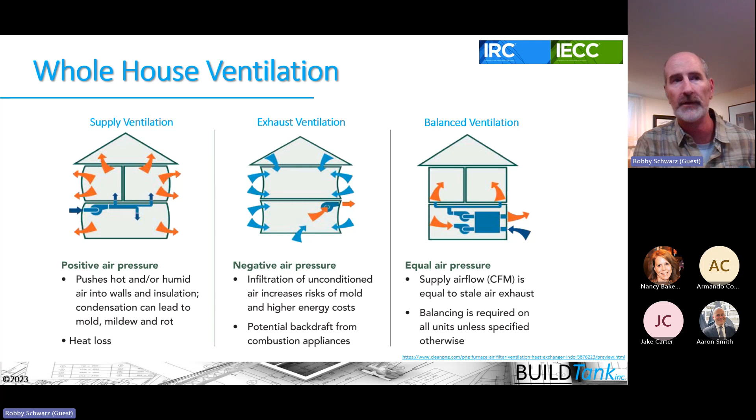I'm going to skip this and get into the ventilation trigger here. You'll see in the 2021 code, it's no longer linked to air tightness—you basically just have to provide mechanical ventilation. The assumption is that building at 5 or 3 air changes is tight enough to begin needing mechanical ventilation systems. You're allowed to do supply ventilation, exhaust ventilation, or balanced ventilation strategies in order to make that house work. There are advantages and disadvantages of all the systems. You need to pick a climate-specific one that works for you and your particular design.

Okay, our last control layer here, we'll cruise through in our last 5 minutes, which is the bulk water control layer. It's all about draining the water down the building and ultimately getting it away from the site.

You do have to go to the IRC to see where it's talking about this control layer. But it's really talking about that weather-resistant barrier. You can also look at the roofing sections to talk about how to dry in your roof and drain that water off. But you can see one layer of water-resistant barrier shall be applied over the studs or sheathing on all exterior walls with flashing as indicated to provide a continuous water-resistant barrier behind the exterior wall veneer. The water-resistant barrier material shall be continuous to the top of the wall.

So why I often say that Tyvek or other fabric type weather resistant barriers work really well as weather resistant barriers, but they aren't always installed as air barriers there. So again, we're going to get that belt and suspenders approach benefit from the water resistant barrier. But unless we also seal that barrier to the top and bottom of our assemblies, we're not going to get the true benefit of it as an air barrier there. But it works well for this bulk water control here.

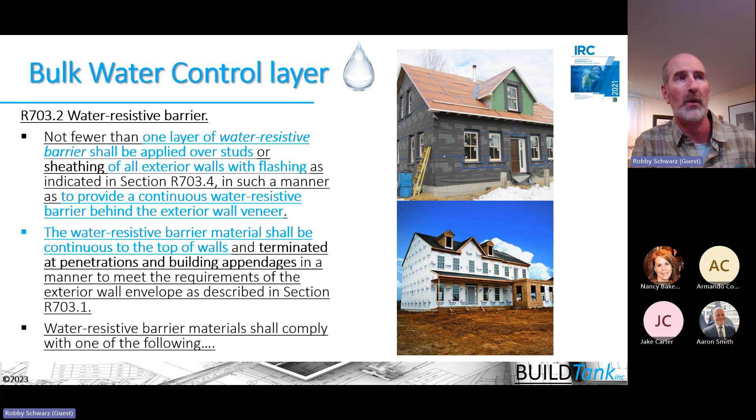The other thing I wanted to point out was this part specifically for dry climates. It says that water-resistant barriers shall be a 2-layer system when you're using stucco, for example. The individual layer shall be installed independently such that each layer provides a separate continuous plane. And what they're getting at there is that stucco is going to adhere to one of those layers there. What they really should say is that you should have a sacrificial layer.

It doesn't have to be a true water resistant barrier, but it has to be a sacrificial coat that the stucco, or lick and stick stone, or any type of mortar-based stone can adhere to, so that you have the continuity of the drainage plane behind that system that becomes the sacrificial coat for the mortar there. Then it says the water resistant barrier shall be separate from the stucco by a layer of foam plastic, non-absorbing layer, or a designed airspace here. So you can use products like the Keene system that creates a designed airspace, Dörken products, different products out there that create that design airspace here.

And really that's important in any climate zone. It just happened to be an issue here as well. And then there's some issues in more moist and marine climates that you can look at as well. And then the IRC continues to talk about flashing membranes, that they shall be applied in a fashion that prevents the entry of water in our system.

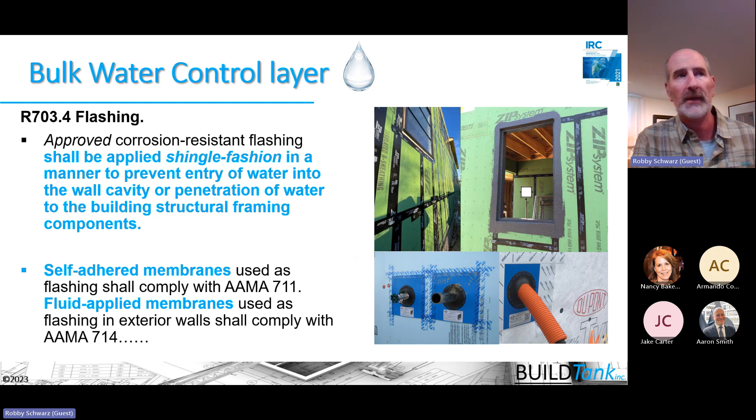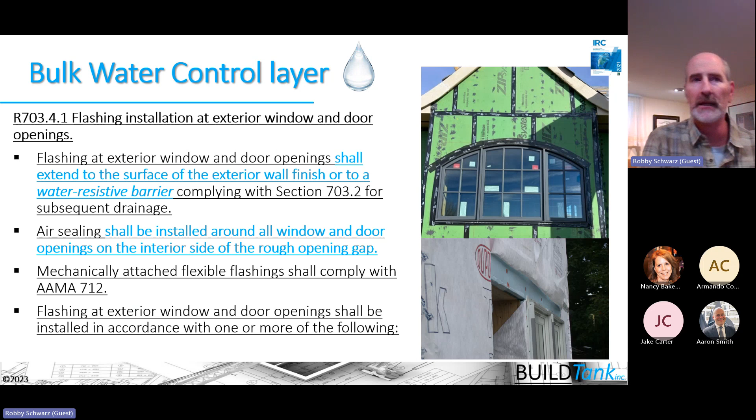So we have all kinds of new products with the zip sheathing or the quick flashing materials. How we integrate them into the weather resistant barrier to make them work is super important. But the code helps give us guidance around windows and doors and other penetrations, that the flashing of openings shall extend to the surface of the exterior wall finish or to the water resistant barrier, so that we get that clear drainage all the way down and then ultimately out and away from the house.

Kind of the biggest bang for the buck is if we can get builders to adopt this idea of a vented rain screen. Regardless of the product that we're using to clad our houses, moisture bypasses it, and we need that vented space to promote drying, to allow us not to have to install a class 1 vapor retarder, and to promote drainage down and out behind that cladding system there. So the single big thing that we could promote as a group is the use of that vented rain screen. There are a variety of different ways to get it done here, but we need to get it done.

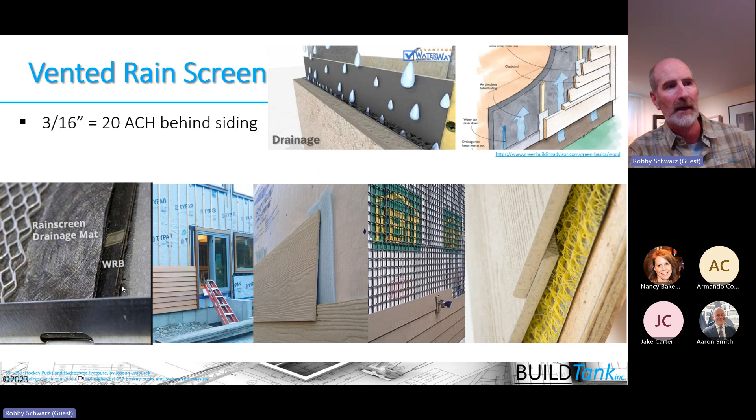And this one on the left here kind of gives you the idea of the sacrificial coat that stucco will need to adhere to, but to maintain that gap and the weather resistant barrier underneath it there. Again, there are different ways of doing it, but ultimately from a bulk water management perspective, and really understanding all the control layers, we're trying to prevent the wetting of our assemblies from exceeding the ability for our assemblies to actually dry.

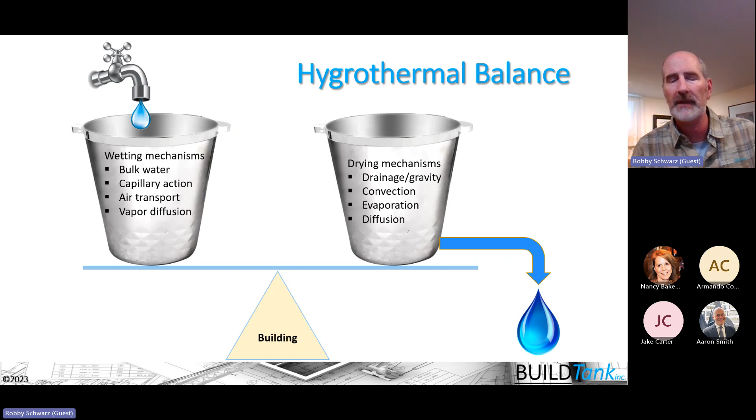So this kind of hygrothermal balance is what we're talking about—keeping that balance so that wetting mechanisms don't overcome drying mechanisms, so we have balance in our assemblies.

So ultimately, for the biggest bang for the buck here: energy efficiency, putting in better glass, understanding weather-resistant barriers, understanding the true value of continuous insulation, and why the code is moving steadily to get more insulation outboard in our assemblies.

That's what we're trying to promote through the codes and code adoption. So the code provides a lot of flexibility. The code is trying to protect the building thermal envelope and ensure we think of it as an assembly of things, kind of a belts and suspenders approach. The building science wrapped into the code is all about creating control and predictability, and that's baked into a variety of sections in the energy code.

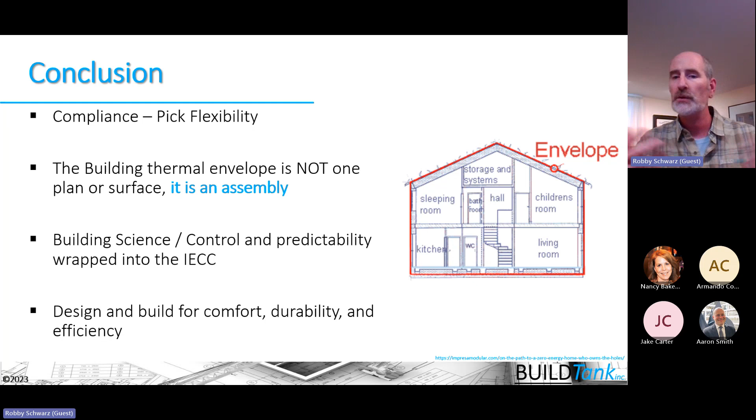Remember that the codes are a family of codes—they work together. So we move from the energy code to the IRC, to the IMC, to the different codes that are there, and we ultimately are designing for modern day comfort, durability, and efficiency. That gives us synergy, that idea of systems thinking baked into building science. Synergy is basically where two or more things come together to achieve what we couldn't achieve before. So we really need the codes to help us understand that.

So I just went over our time, but I'm happy to stick around if anyone wants to talk or ask questions. And thanks so much for having me.

Yeah, Robby, thank you so much. That was great, particularly helpful as the 2021 IECC updates.

What's your take on—I think what the code is telling us in a lot of the northern climates is we're going to go to R60 attic insulation, but are we not going to see a trade-off where people use an energy heel truss with R49 insulation continuous to the edge? And if that's the case, why not codify an energy heel truss?

Yeah, it's a good question. So that allowance to go down to R49 is only allowed when you're using the R-value table compliance option. If you don't want to use a raised heel truss, you have to go to a software modeling compliance option. Still a lot of people don't want to use a raised heel truss because of the expense and whatnot, and that's probably why they're not codifying the raised heel truss.

But in implementation, you're also seeing a lot of jurisdictions not enforcing the raised heel truss when they're using the R-value table for compliance. So it's a big thing. What you're going to see in 2024 is it's going to move back to the base requirement of R49 from R60—you've pretty much hit the diminishing return on your investment at around R49 to R50. So you'll see it go back in 2024.